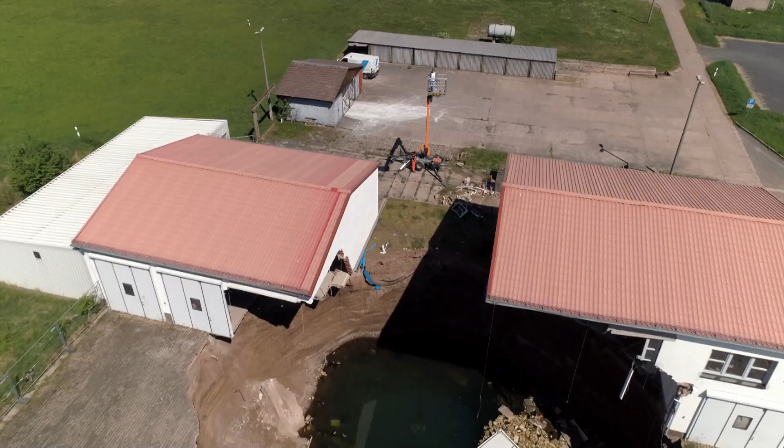A breathtaking bridge becomes a crossing catastrophe. Walking becomes very dangerous. You can fall down very easily. And a German town in danger of going underground. The building starts to break in the sinkhole. That was really terrifying.

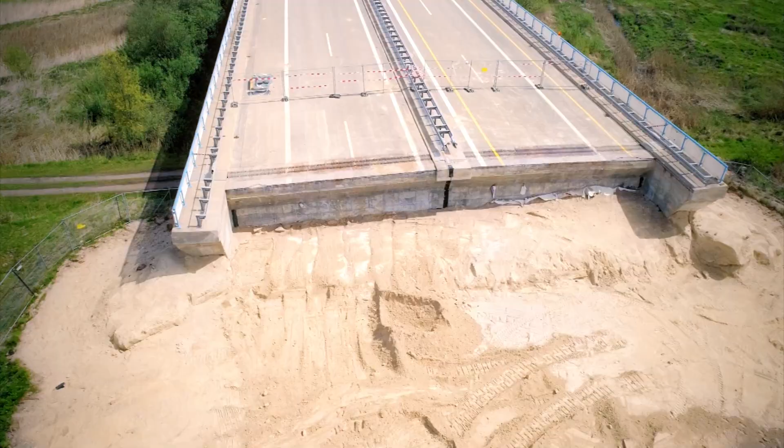With big builds, even the smallest mistake can be a huge disaster. From miscalculations to misunderstandings. These are the massive engineering mistakes that only an expert can hope to fix.

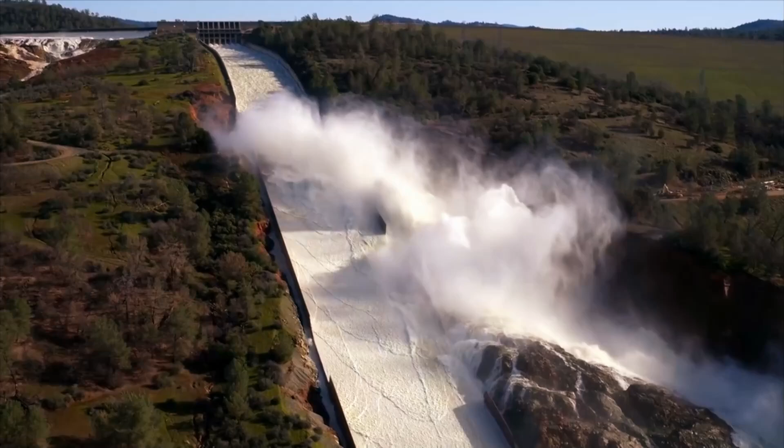Construction is all about measuring twice and cutting just once. But sometimes, despite the double checking, things don't quite go according to plan. Like this first construction calamity in San Francisco. And a luxury tower where residents were getting a distinct sinking feeling.

He rolled this marble 10 feet toward me. The marble slowed to a stop, turned around, and rolled back. We were flabbergasted. Even though the Earth is not flat, an apartment's floor should be. Something weird is clearly going on.

San Francisco, the city famous for the Golden Gate Bridge, its streetcars and winding roads. When you think of San Francisco, you might think of the birthplace of the tech revolution, its beaches, or its trendy neighborhoods, but this city also has some amazing feats of engineering. Manhattan is about looking up. San Francisco is about looking out.

And one of the best places to see this spectacular view is the Millennium Tower. 58 stories of prime West Coast real estate. Basic apartments sold for around $2 million, with the penthouse commanding a cool $13 million. Former resident Frank Jernigan bought a 50th floor apartment in 2011.

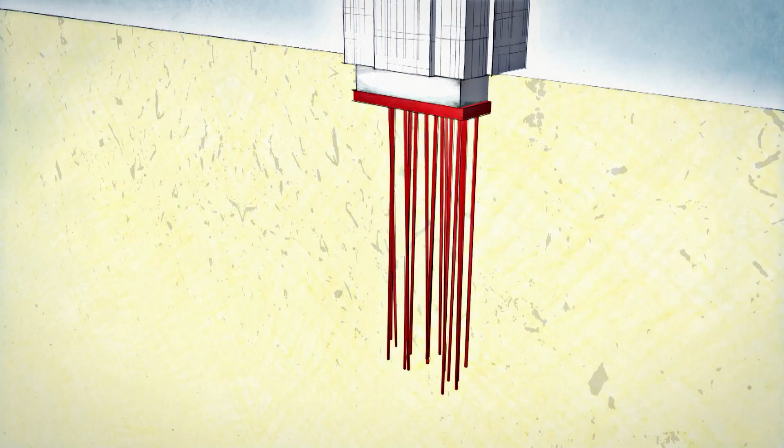With the tower sinking a lot more than was initially predicted, experts wondered whether the foundation wasn't strong enough. The tower sits on a giant reinforced concrete slab, which rests on around 900 long steel rods called friction piles. However, the piles only go down around 25 meters, less than halfway to the solid bedrock 60 meters underground. But that alone shouldn't be a problem, as engineer Gerald Cawthon explains.

The pile is actually held up by the sand or the dirt around the outside of the pile. Now at first, it'll go down pretty easy. The pile driver starts to hit them, and as the pile driver hits them, it gets harder and harder to go down. Now it's getting harder. I'm not going as far every time I hit it.

So why does it get harder to push it down in the ground? Well, that's what friction is all about. The sticking power between the soil around the pile and the steel pile itself is what is holding that pile up. Now it's virtually stopped.

Driving piles into the sand is like putting up a beach umbrella. In shallow sand, it wobbles, but the deeper you push it, the more stable it becomes. More sand equals more friction. The Millennium Tower is just this on a much bigger scale. Dozens of other towers in the area have similar foundations without sinking. It seems the Millennium Tower has a much weightier problem.

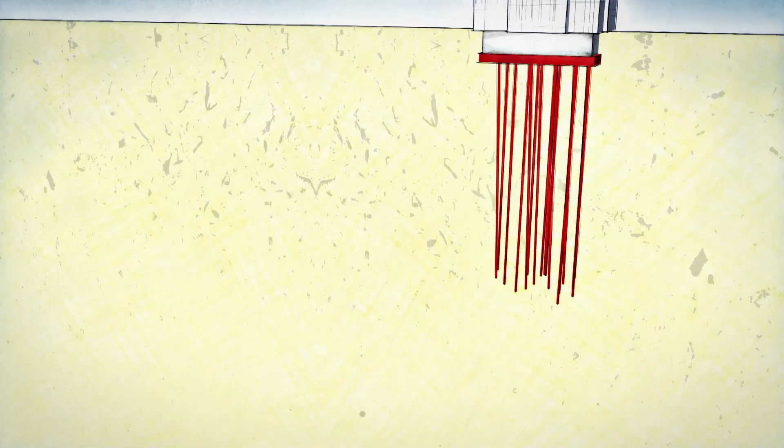The tilt is up to 36 centimeters off kilter, which may not sound like a lot, but in an active earthquake zone, any imbalance could prove disastrous. The root of the problem could go deeper than the foundation. The very ground beneath the tower isn't as solid as it looks. Geologist Dr. Ray Sullivan is on the streets of San Francisco to explain.

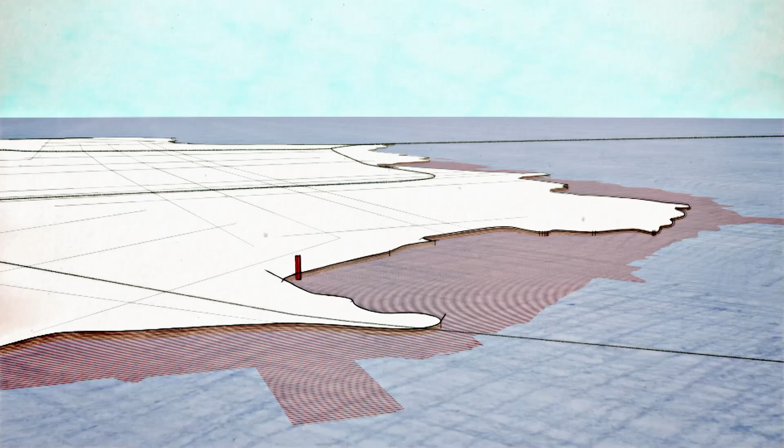We're in an area of filled land. This was a marshland area. If you stood here in 1849, we would be surrounded by mudflats, ravines, creeks. This whole area had to be filled. Around 170 years ago, the tower's location was swampland. As San Francisco grew, rock, sand, and trash were used to build out the land, creating a far from solid foundation.

We have here 2 or 3 storied structures. They're on filled land and therefore subject to a certain amount of settlement. And if you look to my right here, you can see that the door is 3 or 4 feet below us here. This is due to subsidence. If you look to the east of us, you can see the Millennium Tower, which is also on fill.

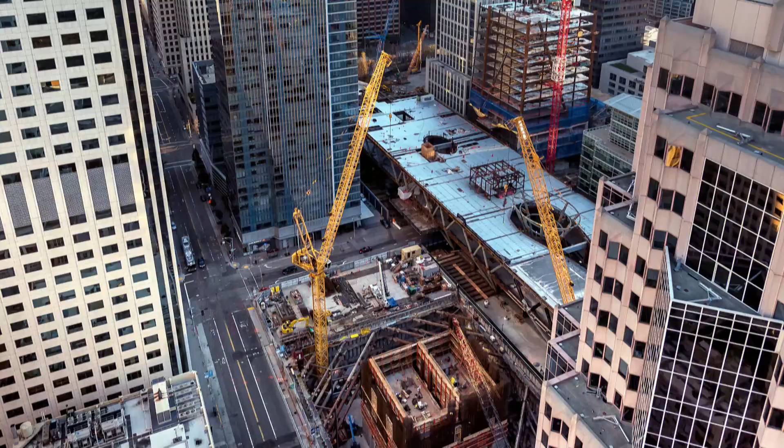As unpredictable as the ground may be, that might not be the only reason the building is tilting and sinking. Some speculate that a nearby construction project is to blame. The Transbay Transit Center broke ground soon after the tower was completed. The Millennium developers think that the removal of groundwater from the site may have caused the dramatic drop. Construction sites across the globe use dewatering to make drier conditions for them to work in. The problem is this can upset the local water table, at least temporarily.

As soon as the work next door was over, the groundwater table came back to its previous level. And yet the building is continuing to settle today, even though that work was done years ago. It's been 4 years since that work was completed, but the settling continues. So the settling went on before there was any excavation. It went on after the construction was finished next door. I do not personally think that the next door work had anything to do with this.

While the cause of the problem is up for debate, the building's residents are focused on finding a solution. Everybody has their opinion about what is going to happen in the future. Some people are confident that it will be fixed. Is there any way they can stop the tower from sinking? They've talked about freezing the ground. Freezing the ground would mean you'd keep the ground under that building frozen as ice in perpetuity. It would be forever. And so that is a very expensive thing to do.

With deep freeze seeming unlikely, experts search for other ways to stop the sinking. Now, there have been people who've talked about lopping 20 stories off the top. I think it may have been the New York Times that made that suggestion. Was that facetious? Maybe. But if none of this other works, they're going to have to do something. These solutions range from wacky to downright ridiculous. Is there any way forward that might actually be workable? The drilling rigs beside the tower hint at a possible answer.

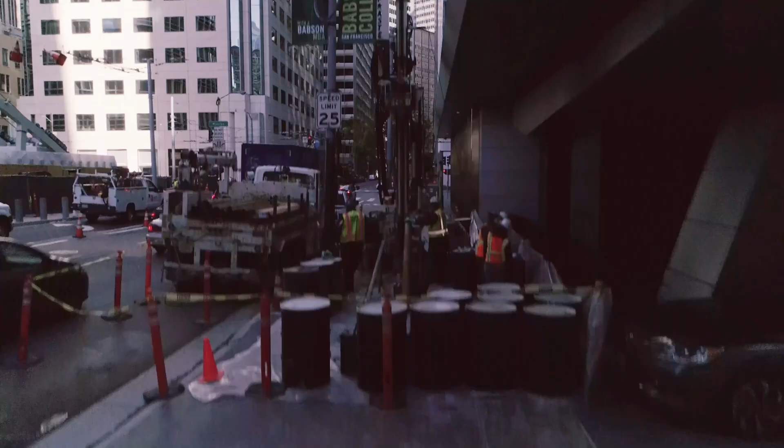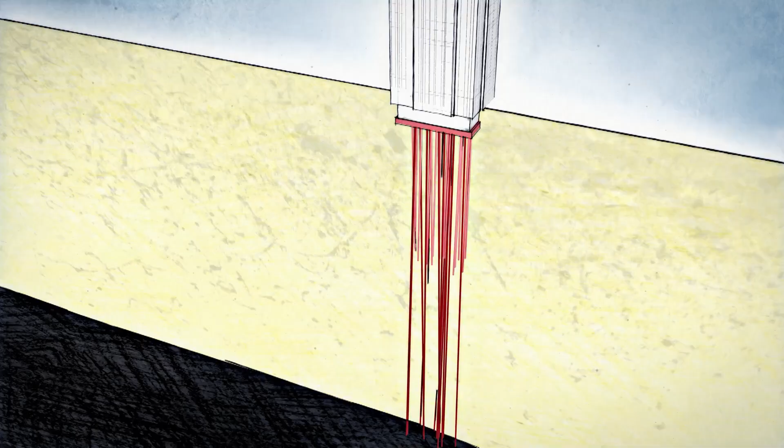The best guess at the solution is the addition of longer piles, this time going down as far as the bedrock. It won't be quick or cheap, with estimated costs in the hundreds of millions of dollars. Clearly, if we thought it was going to be fixed anytime soon, we would have stayed, but I'm afraid we lost faith in that. It does seem like the Millennium Tower's problems are not going away anytime soon. But I hope, for the sakes of the residents, that they actually do come up with some kind of solution so they can start enjoying living in one of the greatest apartment blocks in the US.

With some construction catastrophes, the errors are blindingly obvious, even when they're hidden at the bottom of the sea. For this blunder, we head to Venice, Italy, where this ancient city is struggling to keep its head above water. This engineering project gives me a sinking feeling. It's an engineering catastrophe on an unprecedented level. Disaster-wise, on a scale from 1 to 10, this was off the charts. An underwater construction project that's struggling to stay afloat. Unless something is done, Venice is in trouble.

Venice, Italy. This unique and iconic city was founded in the 5th century and lies on more than 100 islands in the Venetian lagoon. Environmental scientist Jane da Mosto has lived here for over 20 years. Venice is a UNESCO World Heritage Site. Venice has an architectural style that you can't find anywhere else in the world. Built centuries ago, Venice is an engineering marvel. The foundations of it were built using wooden piles in marsh and sand, yet it still stands today as one of the world's most iconic cities.

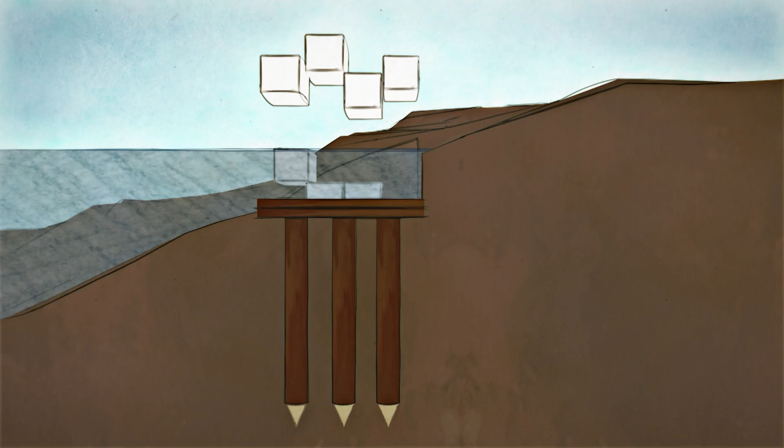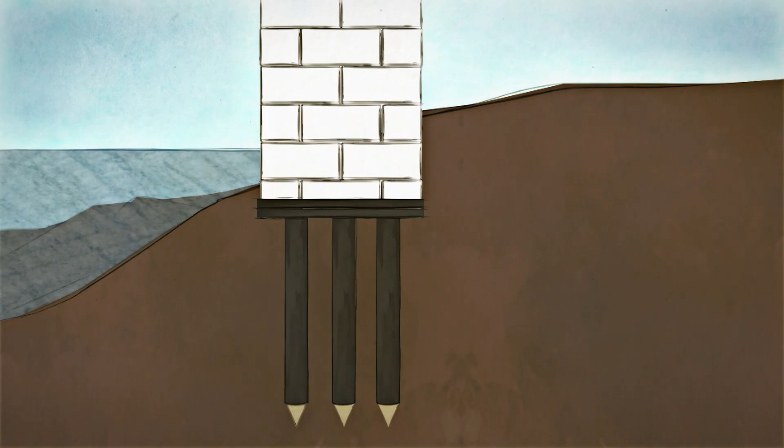Venice was built on millions of closely spaced wooden poles, 18 meters in length, hammered through soft mud into the solid clay below. Protected from oxygen, the wood doesn't rot, and in fact, thanks to the mineral-rich waters, becomes petrified or hard like stone. The foundation might be solid, but there's no getting away from Venice's low-lying and wet location. Venice is on the ocean, and with these huge tidal surges and rising sea levels, it's a recipe for disaster.

Between autumn and spring, Venice experiences abnormally high tides, known as the acqua alta. These tides are made worse by strong seasonal winds. The impact can be devastating, something residents like engineer Vincenzo Di Tella know all too well. When there is this tide, Venice is completely flooded. So it's not possible for the normal activity. It's only possible to go with a boat inside the river, but you cannot go on the street.

Tidal surges have long been a problem for Venice, but in 1966, it had the worst flood in recorded history, and the government finally decided something has to be done. The Italian government pledged a solution, but it wasn't until the 1980s that the Mose project was conceived. Mose was named after the Old Testament prophet Moses, and like its namesake, the plan was to hold back the waters that were threatening to engulf Venice. In the 1980s then, the Italian government began to prototype a tidal barrier that could rise when it was most needed, when there were the largest tidal surges.

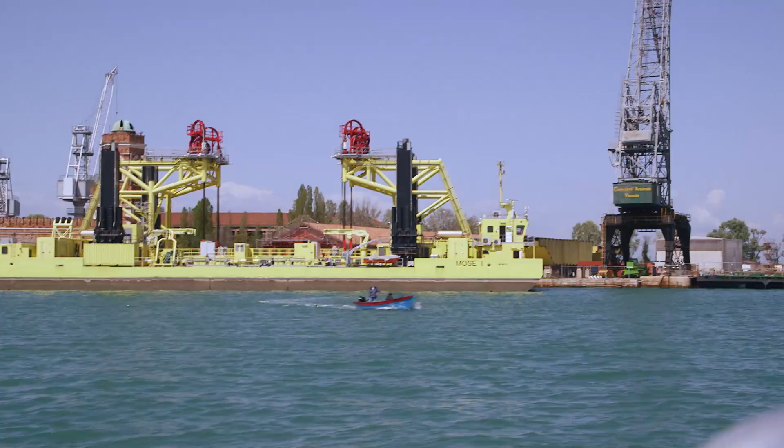Mose would be an engineering project on a biblical scale. They use that term still because of its reference to Moses, who parted the water, as though this engineering project is going to have the same kind of universal powers to defeat the physical forces of the world. After decades of discussion, design, and prototyping, in 2003, the go-ahead to build the barrier was finally given. The aim of this ambitious project was to divide the Venetian lagoon from the Adriatic Sea by placing barriers across 3 inlets. A total of 78 mobile gates needed to be laid at the bottom of the seabed. Each one is 28 meters long, 20 meters wide, and weighs a colossal 300 tons.

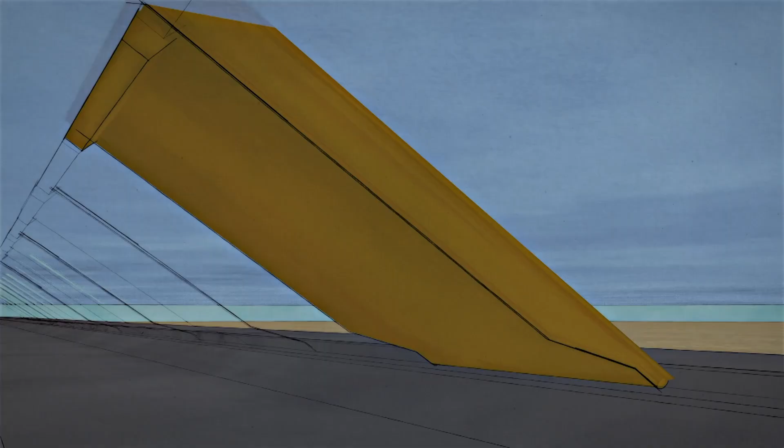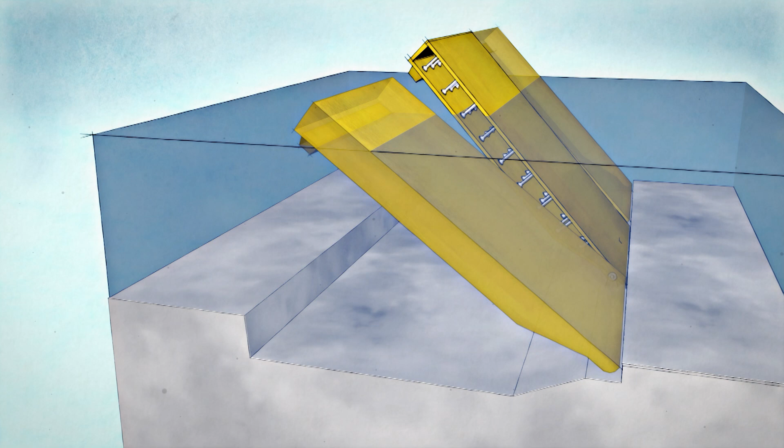Mose consists of a series of gates that lie flat on the seabed, and they're hinged at one end. And to activate them, air is pumped into the gates, and through the principle of buoyancy, the gates rise up, providing a barrier between the Venetian lagoon and the Adriatic Sea. The design was revolutionary and would allow authorities to open and close the sea gates to cope with tidal surges of up to 2.7 meters. At least that was the plan.

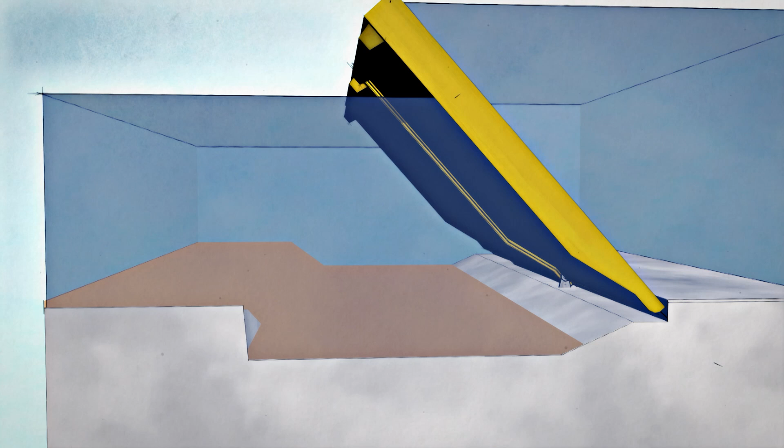But to match the biblical scale of this project, the catalog of catastrophes has been almighty as well, becoming a joke amongst Venetians. So what they didn't think about was that when the barrier's up, tidal forces can push sand and silt underneath the barrier, so it can't sit back down properly. Engineers realized that when the gates were raised, sand would settle in the trenches, which meant that when the gates were shut, they couldn't close properly. The materials used in the construction of the barrier have already shown significant signs of wear.

Another really difficult problem is corrosion. The gates that were installed underwater are already showing huge signs of corrosion, and gates that haven't even been put in yet, that are on the land, are starting to rust. So this is going to render them much, much weaker and can lead to huge mechanical failures in the future.

The barriers are made out of these big metal panels, and the paint is being corroded. That's also something that is a well-known feature of salty water. The gates are corroding, even the replacement gates are corroding. Clearly they chose materials that just couldn't withstand salt water and sea air.

To add insult to injury, a tiny Venetian resident is causing huge extra problems. What they didn't also think about was the environment at the bottom of the sea. There's lots of mussels and all sorts of creatures down there, and they start to live on the brackets, on the hinges, meaning that sometimes these hinges are inoperable.

There was some issue with the hinges, and lo and behold, there were mussels growing on the hinges. And the only way to deal with that is to have divers go down and literally scrape them off, which just seems ridiculous. All these massive oversights have Venetians up in arms.

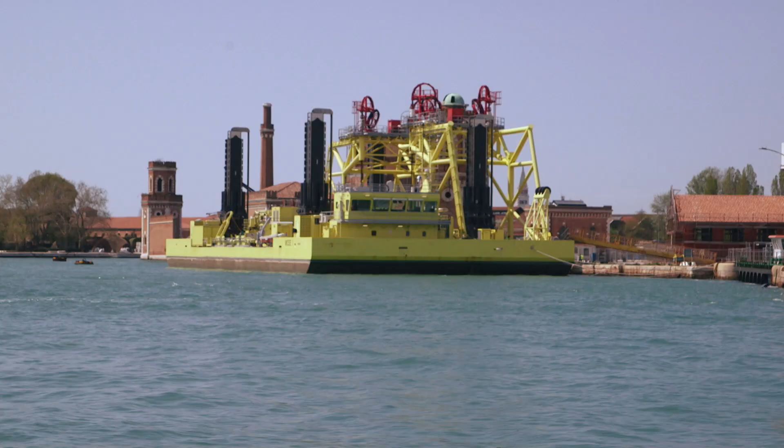With the solution to the issues far from certain, it seems the Mose project has done a better job at dividing opinion than parting the sea. This project has been going on for years, has been costing billions, and still has a lot of work left to go. But the tide is coming, and if Venice is to be saved, something must be done.

Many Venetians maybe thought that the Mose could stop the high number of tides. But now, looking at the works, the delays, the money, the problems, Venetians, I think they have enough of this project. Let's hope the Italians come up with an engineering solution that will protect this iconic city.

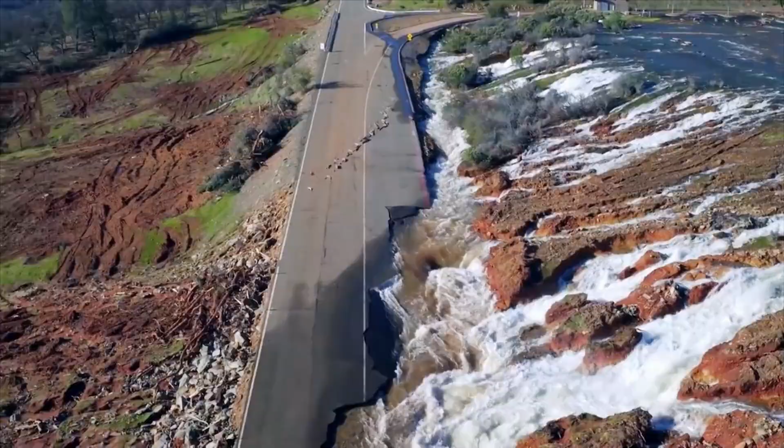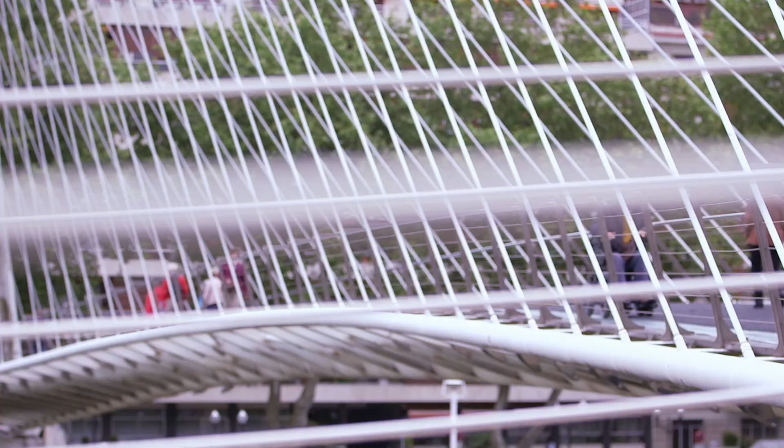Sometimes, the bigger the construction project, the greater the potential risk. And when it comes to groundbreaking builds, the last thing anyone needs is a monumental slip-up. For this next building catastrophe, we're off to northern Spain and a project known as the Zubizuri, or White Bridge. Walking becomes very dangerous. You can fall down very easily. An ambitious design that's become a construction calamity. It's so obvious. They should have guessed that would happen.

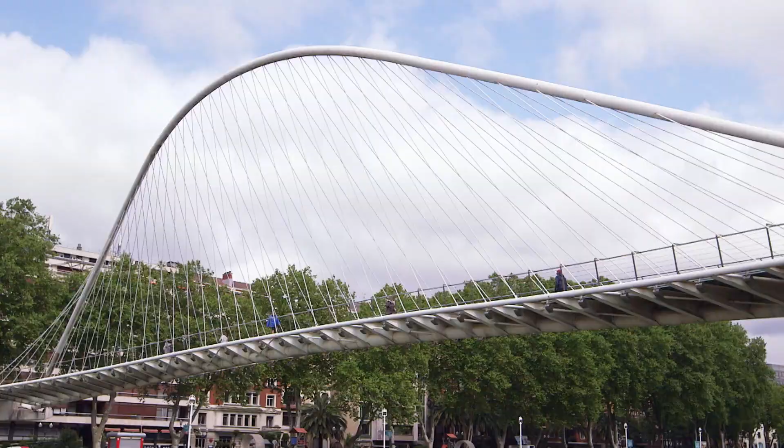The 76-meter-long steel and glass Zubizuri Bridge was key to Bilbao's transformation. Its sweeping white lines and sheer glass floor were designed to celebrate the port's nautical heritage and unite the city. Bilbao was a city of two halves. On the one side of the river, the ancient center, and the other, industrial and run-down working-class neighborhoods. Designers hoped that connecting the two halves would reinvigorate the city. Fermin Lopez worked for the company that financed the bridge.

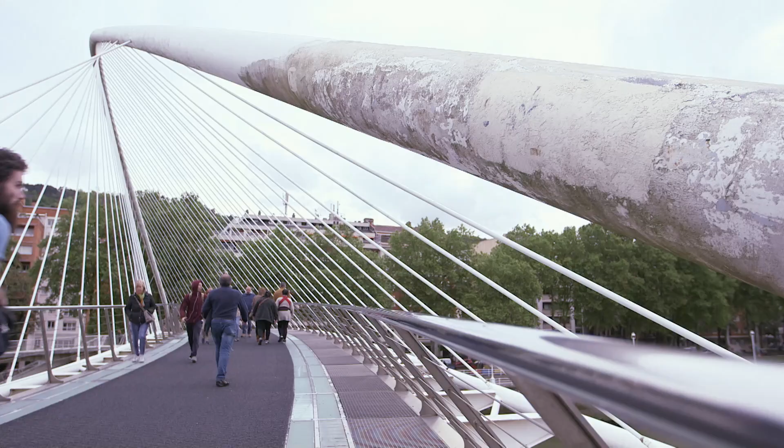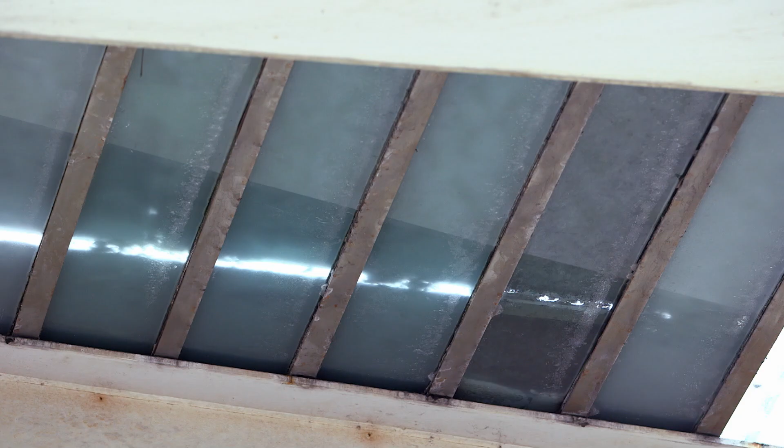People were clearly struggling to get across the bridge without falling. Material scientist Gustavo Schwartz explains the problem. Okay, here we are at the Zubizuri Bridge, which has a lovely design. But one of the problems of the bridge is the floor. I mean, the floor is made basically of glass. And the problem with the glass is that it becomes very slippery when wet. Glass surface is not safe to walk on when wet.

From a design point of view, I can really see what they were going for. The glass tiles would look incredible, but it's not the best choice for a sloping floor, especially when you consider Bilbao's weather, when it rains for 4 months of the year. The mystery isn't why the glass plates were failing, it's why the architect chose to put glass flooring to begin with. We know this is slippery.

The problem with glass is its lack of friction. Friction is the resistance between two surfaces. It's what keeps you upright on a path. Your shoe and the rough ground grip each other. A glass floor is much smoother and much harder to grip. Throw in a slope and rainwater, and you have one hazardous bridge.

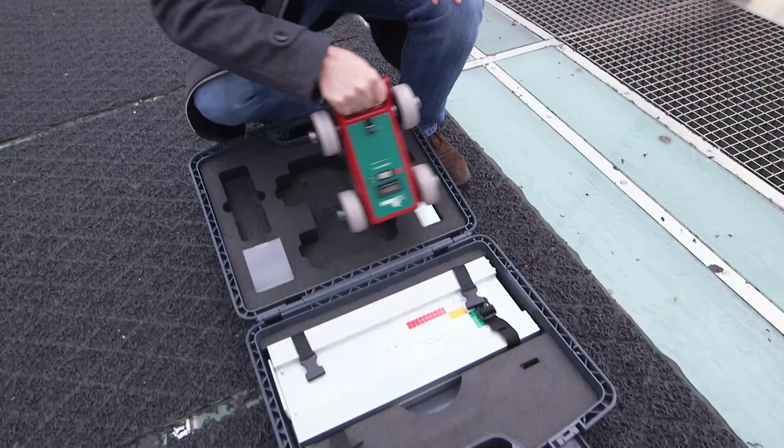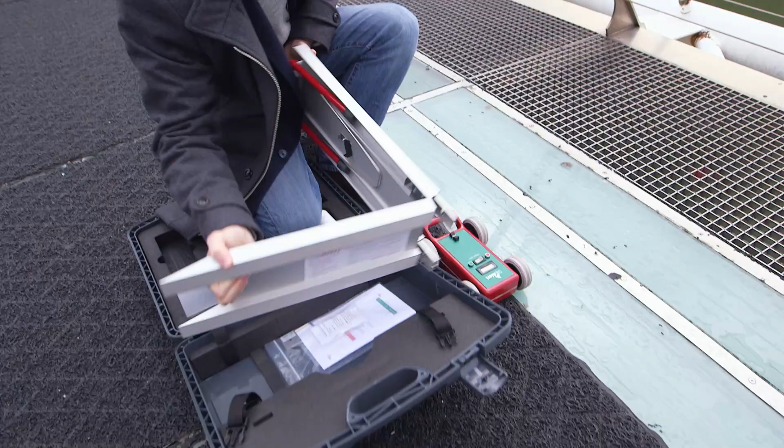Gustavo uses a SlipAlert to measure how slippery the original glass bridge floor is. So we have a small trolley here. We are going to slide the trolley through the surface, okay? And we are going to check how far the trolley is going. The longer it rolls along, the more slippery the surface is. The machine simulates a slip. The higher the reading, the more dangerous the surface. Anything over 180 indicates a high risk of falling.

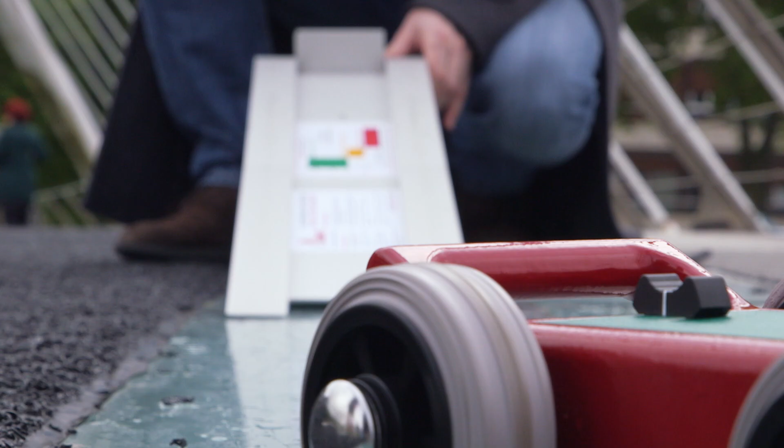Oh, this is really slippery. The trolley is giving us 205. This is a very high value. We are in the most dangerous region. And with this value, one of every 2 people is going to fall down. That's crazy. This is a classic example of style over substance.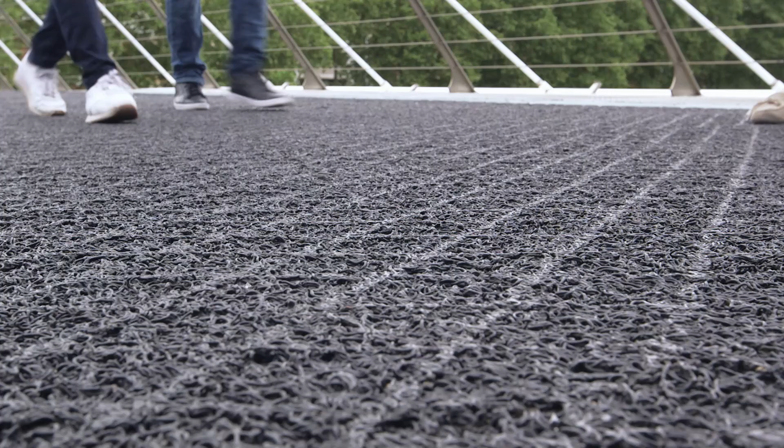In 2011, the decision was made to cover the entire surface with black mats. Local journalist Jose Marie Riveriego covered the story.

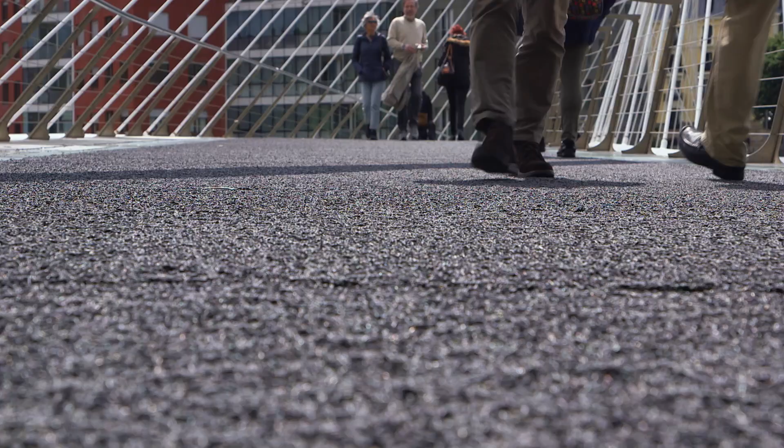If they had used this glass instead of covering with this mat, the bridge could show the brightness, the lightness, and the beauty of the bridge. Using etched glass is a viable solution, and that would stop a lot of the slipperiness problem.

There is no denying that bridge is utterly beautiful. And I'm totally for pushing boundaries. But sometimes you do just have to sit back, hold your hands up and go, yep, this time something has gone wrong.

Construction catastrophes can sometimes happen when engineers ignore what's staring them straight in the face. And occasionally, the disaster lies directly beneath their feet. For this next engineering escapade, we're off to Germany. In February 2016, this sleepy town's tranquility was shattered.

It was really scary and frightening. Ich dachte, oh my God. Oh, it was quite spectacular. Residents woke up to a supersized sinkhole. What on earth could have caused this massive hole? The vast crater rocked this tranquil town, but it shouldn't have been completely surprising.

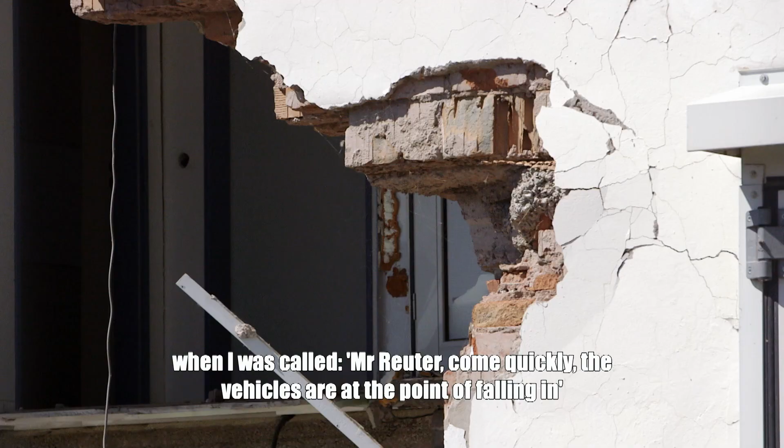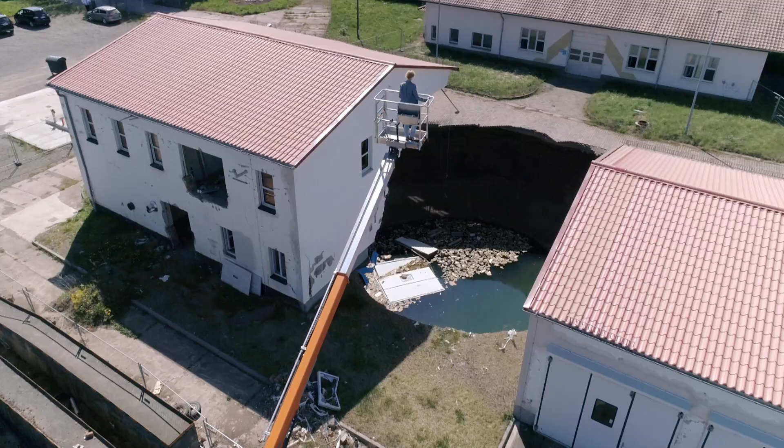It was a Friday evening and I got a call from my boss and he said, oh, come with me, there is something happening. So we went there in the evening and there were already a lot of people and there was a small little breakdown in the earth and the sinkhole was very small in the beginning.

The earth opened very suddenly. It got bigger pretty fast and there was a lot of water and that makes a lot of sound. It was quite a spectacle. We had, well, a small catastrophe on our hands. A massive sinkhole was opening up between two buildings.

Throughout the evening, the sinkhole got bigger and bigger again. And then the building starts to break in the sinkhole. That was really terrifying. Luckily, the offices were closed for the night. We all were very glad that nobody was hurt. So nobody was there in the building because it was in the evening and the night.

When sinkholes happen, they happen fast, without warning. It must have been utterly terrifying to stand there and see this building collapse right into the earth. There's clearly something going on beneath the ground.

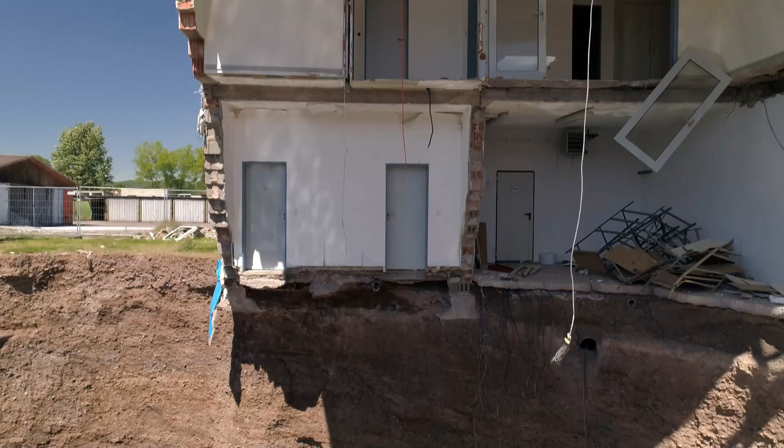Nordhausen, the sleepy town in Germany that in 2016 woke up to the nightmare of a supersized sinkhole. And as the dust settled, people wanted an explanation. The answer seemed obvious. The hills around Nordhausen are sinkhole central.

Geologist Thomas Kammerer was well aware of the surrounding situation. This part of Germany is very susceptible to sinkholes. We have more than 10,000 registered cases of sinkholes in this state. There are thousands of sinkholes of various sizes. Sometimes they are just inconspicuous small depressions, sometimes they are large craters. With 10,000 sinkholes, this area must look like Swiss cheese. There's clearly something going on underground.

The problem is this rock, anhydrite, which means without water, and it's thirsty like a sponge. When anhydrite contacts groundwater, it will absorb the water and turn into this, gypsum. Unfortunately, gypsum is soluble and will dissolve away, leaving a space underneath the ground.

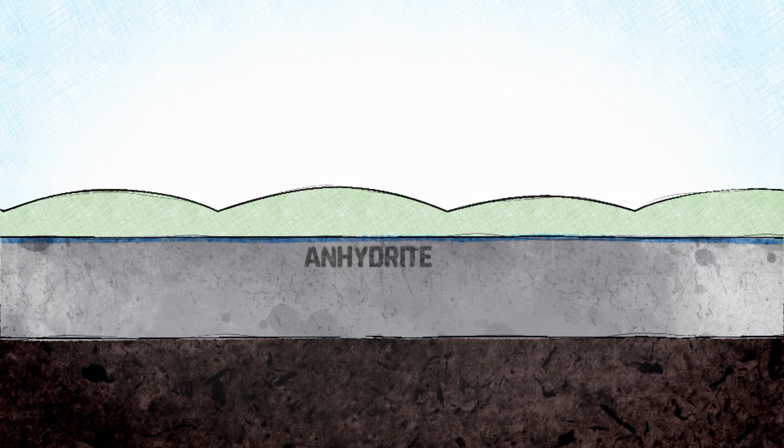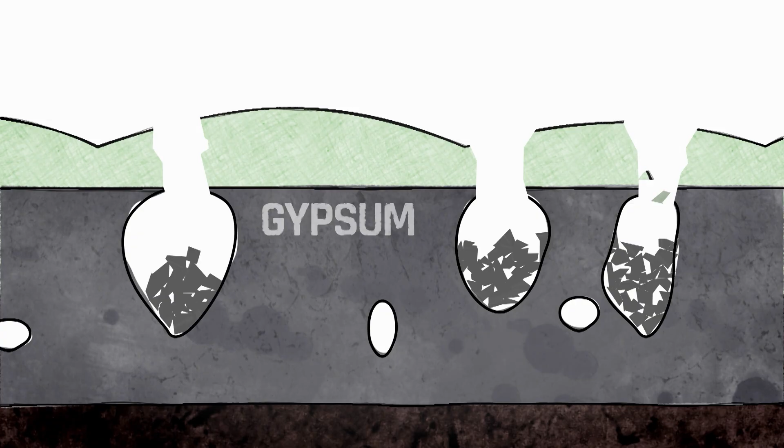The problem can be traced back to a seam of anhydrite beneath the hills around Nordhausen. As groundwater seeps into the anhydrite, it turns into gypsum, which then dissolves, forming caves. When the roofs get too thin, they collapse, creating the region's many sinkholes. Now, this is a particularly good example because we can see both the sinkhole and we can look into the subsurface cave system that is responsible for its formation.

With sinkholes everywhere, one obvious solution is to build nowhere near them. Sven Schmidt's engineering team has the job of investigating patterns in the area.

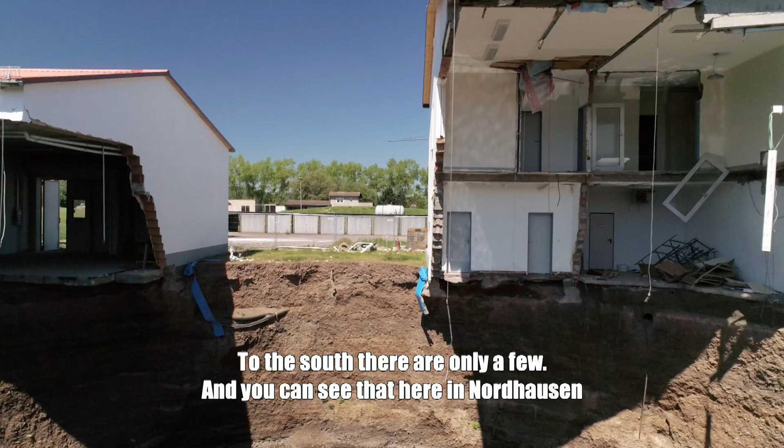Nothing like that has ever happened this close to the town before. We have seen similar things, but not this close to home. It's normal that we have sinkholes in our area, but they are in the forest maybe, so nobody lived there, and so no houses are breaking down in the sinkhole.

Town planners know that the sinkholes in this area exist along a certain cluster, but the giant sinkhole under Nordhausen was not located anywhere near that, so presumably it's an anomaly, but not quite. Just 6 years prior, there was another sinkhole at almost exactly the same spot, and it swallowed up a truck. Wait, there had been a sinkhole in that exact spot in the past?

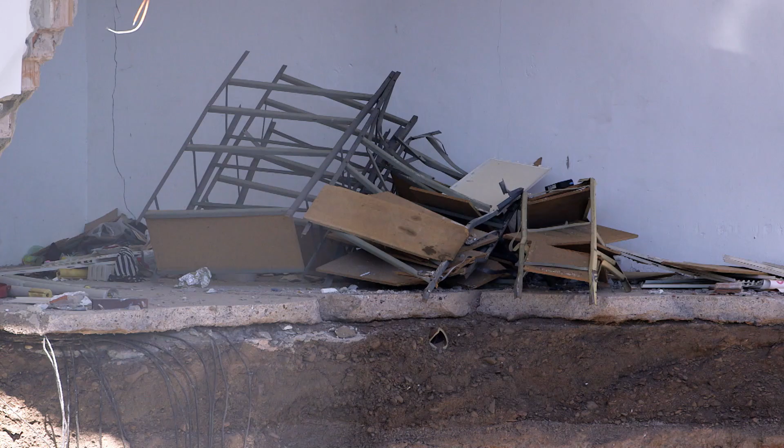And it was filled in, and it's a few years ago. And then our service company moved in here, and they used it as an office just a few weeks. And then the second sinkhole happened. Predicting nature isn't easy, but if you're building in a sinkhole hotspot, surely building in the exact spot where a sinkhole has happened earlier is not a good sign. It was very surprising because nobody expected that there will be a second sinkhole at the same place as the first sinkhole was.

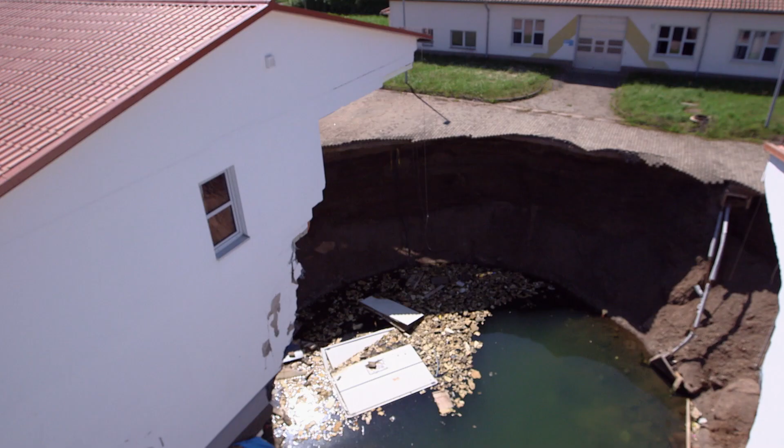With unstable ground making investigation dangerous, it's impossible to predict the cost of fixing the sinkhole, or even how to do it. You can't really get to the hole with any large machines. That's too dangerous, so you can't really demolish it. So it's probably going to stand there and rot there for quite some time. Any sort of groundwork takes masses of material, machines and muscle. And if you don't know how big the hole is, or if it's even safe to go near it, it's probably just best you leave it alone.

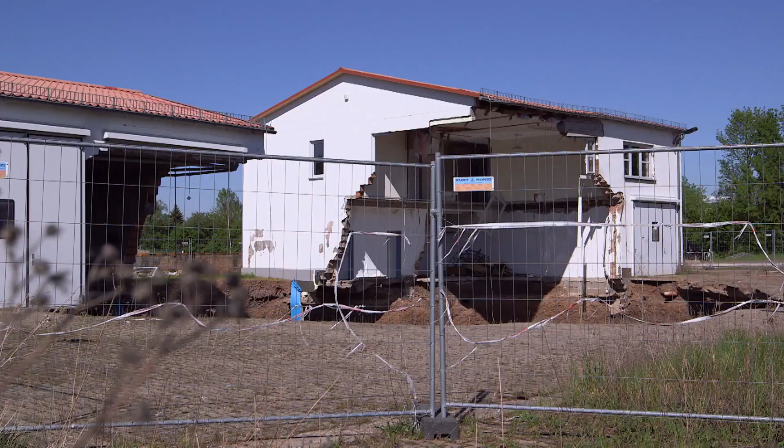So there are no concrete plans to fill in the sinkhole because it's so huge that it would be very expensive to fill it in. We would need a lot of earth. And now nobody can use the buildings ever again. For now, engineers have no immediate answers to this natural disaster.

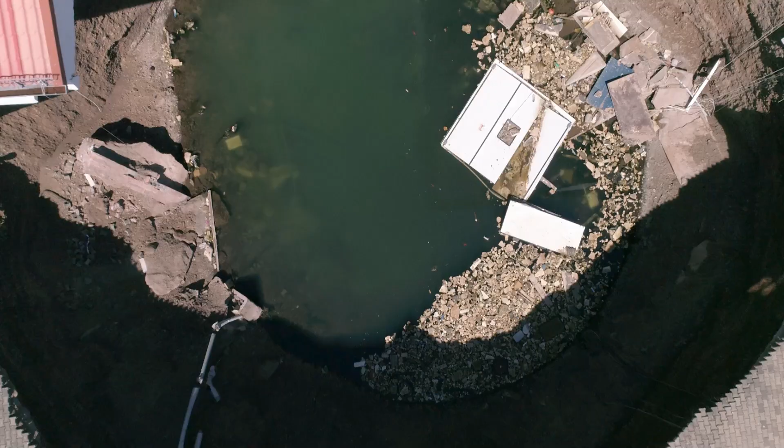We are used to thinking that the Earth is, in our lifetime, a pretty static structure, but we can be faced with quite drastic changes on the surface and in our environment. The Nordhausen sinkhole made the whole structure unstable. There is a lesson to be learned here. If you live in a sinkhole hotspot and you've already filled one in, just build in another place.

Construction calamities come in all shapes and sizes, from the shifty to the slippery, the useless to the wholly ridiculous. So long as we keep building, there will always be more mistakes to fix.